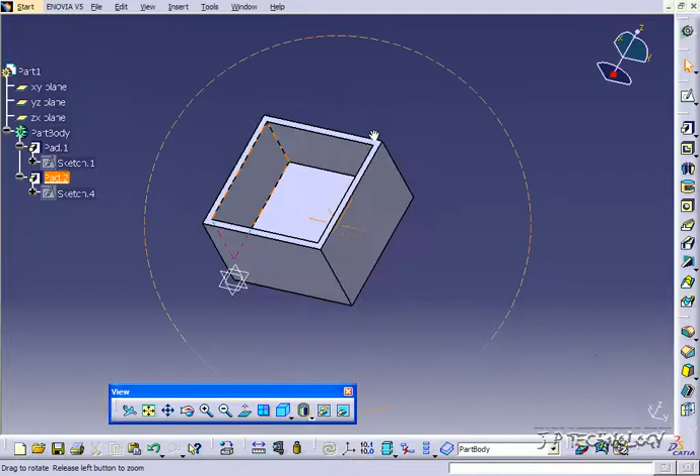To use the Stiffener, all you need is one profile, or one open line, and from that you're able to make a stiffener. So what we're going to do is create a line along here and extrude it across. To start off, let's click this face here and click Sketch.

Now when you're drawing these lines, there's two different ways to do it. You can go from line to line, touching the points there, or you can do it inside the box without touching any of the lines. So this is two different ways of making a stiffener. The first one we're going to make is just draw lines inside this box, not touching the edges.

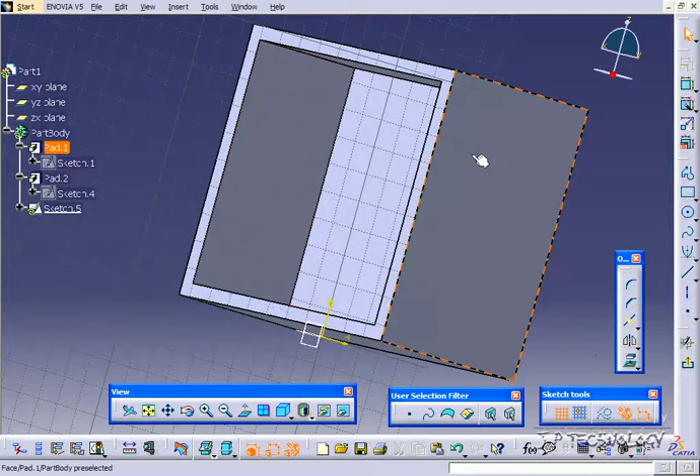Let's rotate it around a bit and just draw a little line like that. If you look on the side, you can see it's inside the box. Now go back up, click Stiffener, and we're going to use the from side mode. You're able to use the from top mode when you click point to point.

If we zoom in, what this lets us do is, with a thickness, slowly bring that sketch out. You'll notice our sketch is only in here, but the stiffener automatically extends it out to the edges and cleans everything up for you.

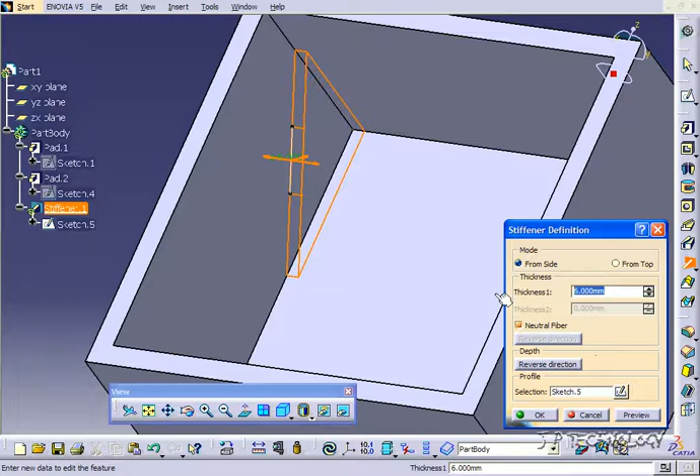So let's bring this out 20, and we'll click OK. And the stiffeners come out 20 millimeters.

Now let's double click on the sketch, and let's just move this around. So let's drag this more over to here, and let's see what our result is. You can see that now our stiffener has moved over also.

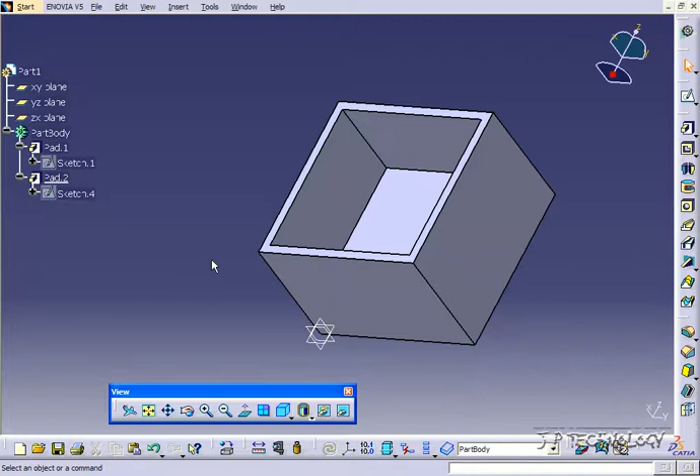Now let's delete this stiffener, and we're going to do it the other way that I was talking about. So let's click this face, click Sketch.

Now click this face, and we'll project the edges, turn them into construction lines, and now we'll sketch from point to point. So we'll do one from this point along here to a point along there. Now let's put a little angle in there so we can play with it after.

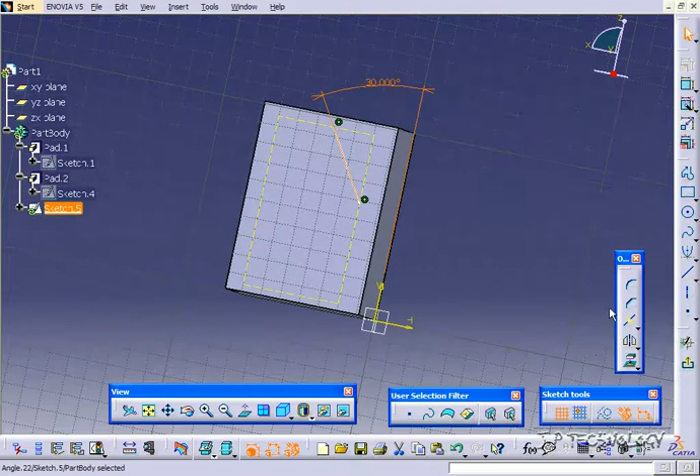So we have an angle of about 30 degrees. Let's put in 30, go back up, and click the stiffener.

From this one, you can use from side or from top. Right now on the from side, we're making exactly the same one we had before. From top, we're going to make one that has a hollow opening in it. So let's click OK.

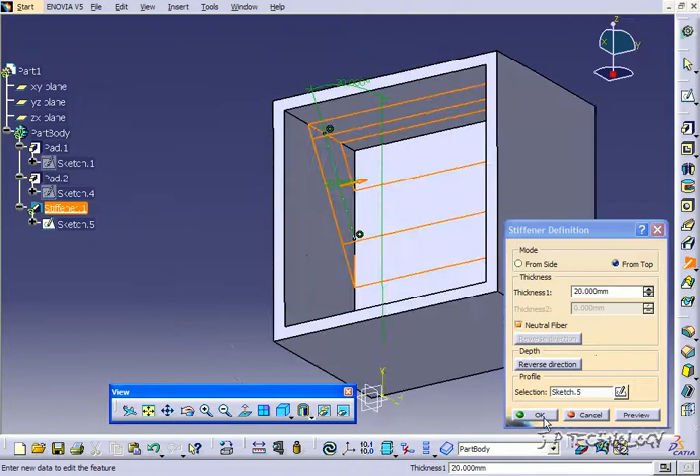Let's click on this surface, sketch out a rectangle quickly, and cut this little bit out so you can see the gap. If you can see in the back there, you have a gap, and that's the difference between using from top compared to from side.

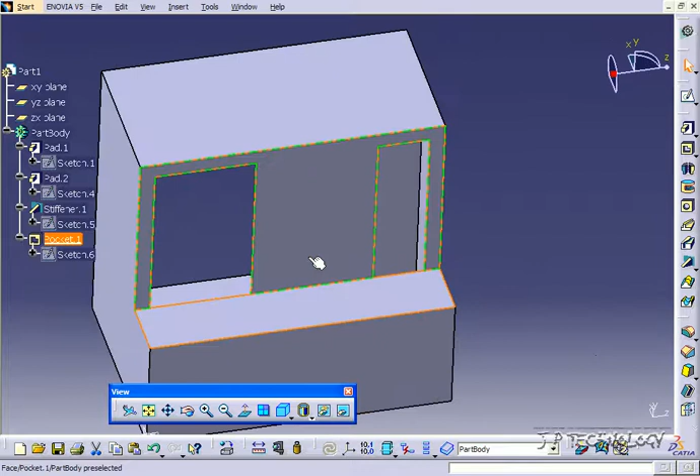And let's go back. Now let's make the stiffener again using point to point, and we're going to use from side. This is just like the other one. We're just going to extend it out 25, click OK, and we'll edit the sketch, change the angle to about 60.

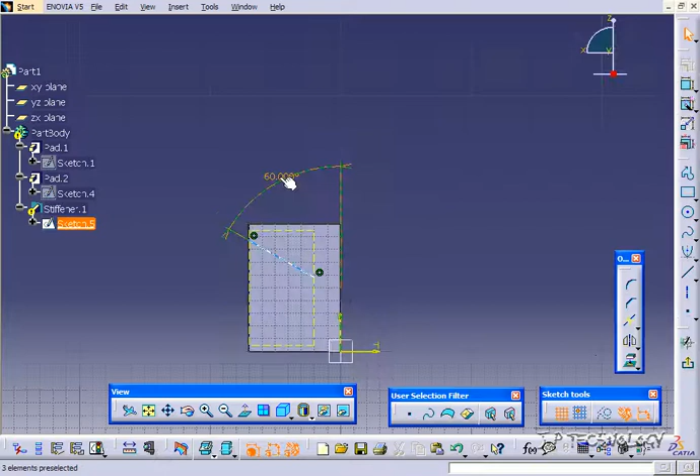Because it was outside, it's not going to work, so let's go back into it, put it to 45, and just bring it in. It should work this time. And it does. So you're able to play around with the stiffener like that.

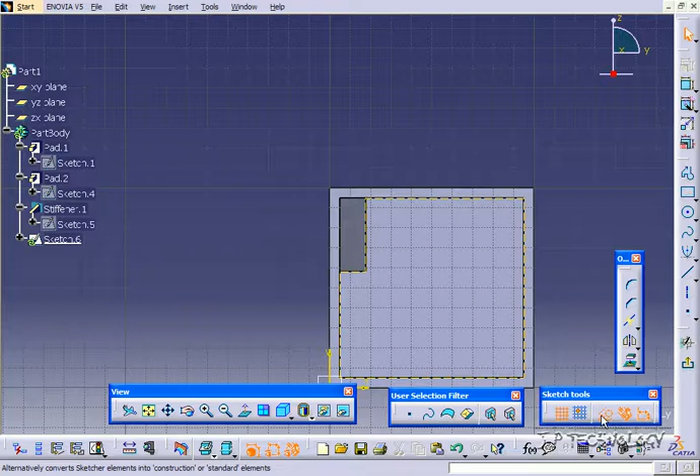Now let's do one that's on the top. So let's click this top surface here, click Sketch. Now we'll click this face, project it out, and turn it into construction lines, and let's just draw a little jagged line across.

And we'll go back up, and we're going to create a stiffener from here. Now click OK and click from top. So now we're able to create the stiffener from the top in this mode.

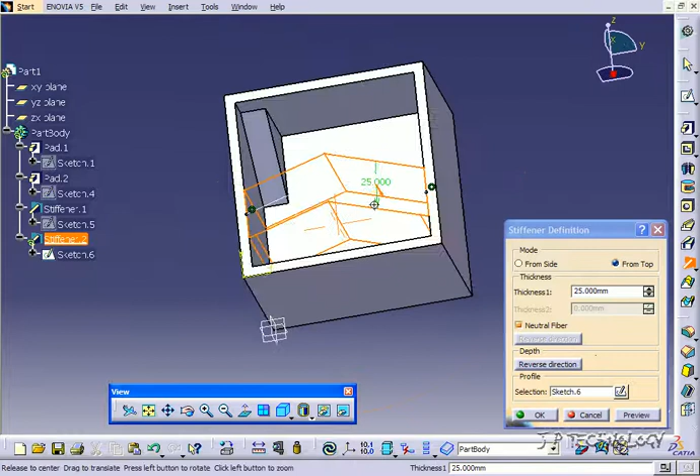So let's bring this down to about 5 millimeters for the thickness. Click OK. And now we've made a stiffener in here for about 5 mils.

So what the stiffener does is allow us to just use one sketch line, and you're able to create kind of like a stiffener inside the part that adds ribs and whatnot. Now we're going to make one more from here.

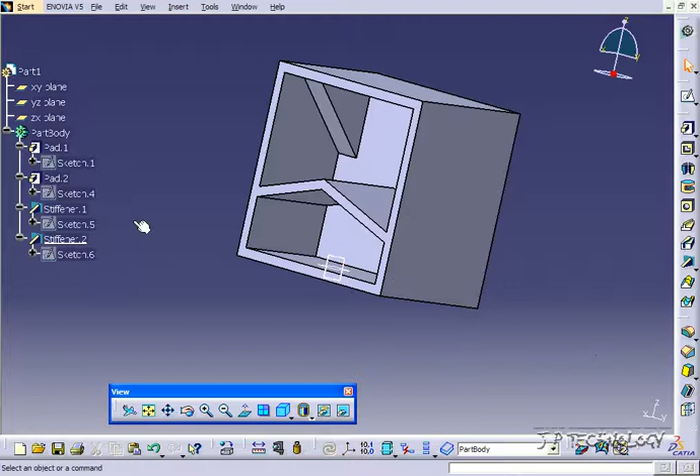So let's double click on the sketch and delete these lines, and let's try to make an organic one. We'll use the spline and make one with a few curves. And we'll go back up and we've created a stiffener with those curves.

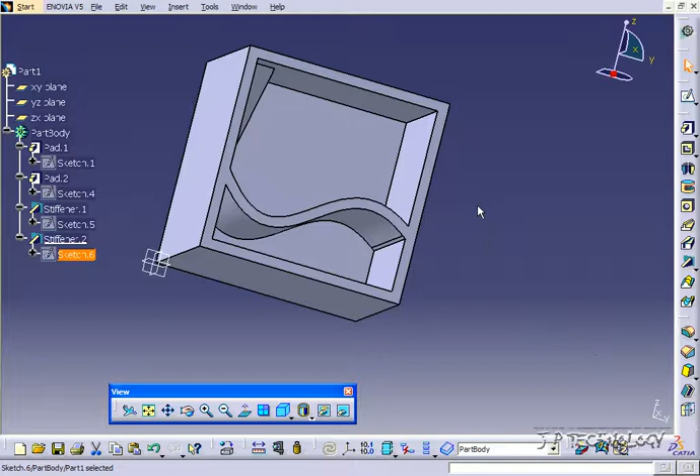So like I was saying, with those lines, all you need is one open line, not a closed profile, and then you toggle between from side and from top to get the results you want. By doing this, you're able to create stiffeners inside parts quickly and easily just from a single line.

And that concludes our tutorial on how to use the stiffener feature within CATIA V5.